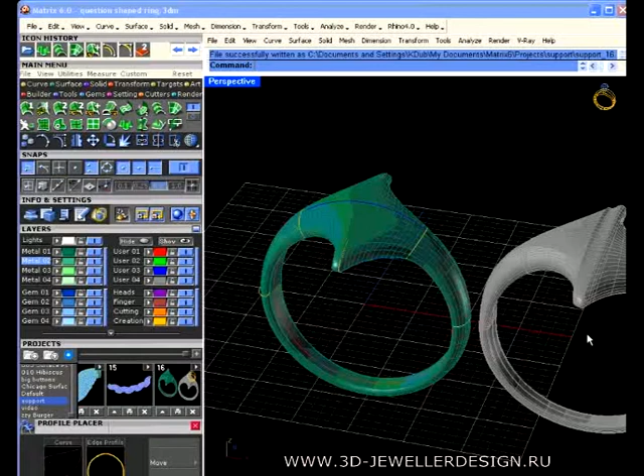Okay, here's a movie on how to do this ring, and you know, these ones, as you have discovered, some of these seemingly subtle, simpler rings are actually one of the harder ones to get a smooth surface on. And here I'll show you how I went about this.

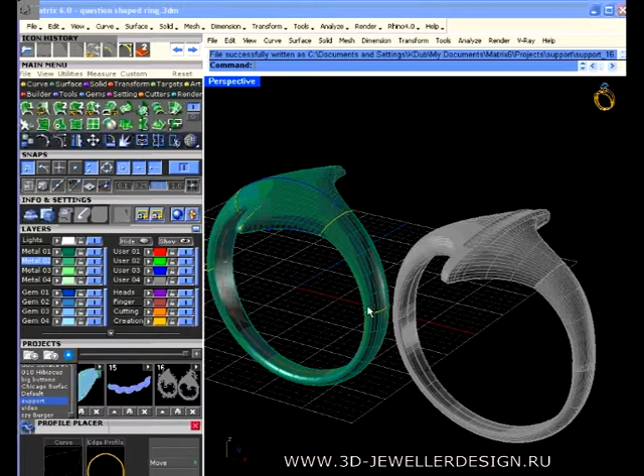And I originally tried to do sweep, multi-rail sweep, and the thing it really doesn't like apparently is here, and it's because this thing comes back around on itself, and that doesn't make sense to sweeps, you know, because it has to be perpendicular to the profile here, but then what does it do when it comes back in here?

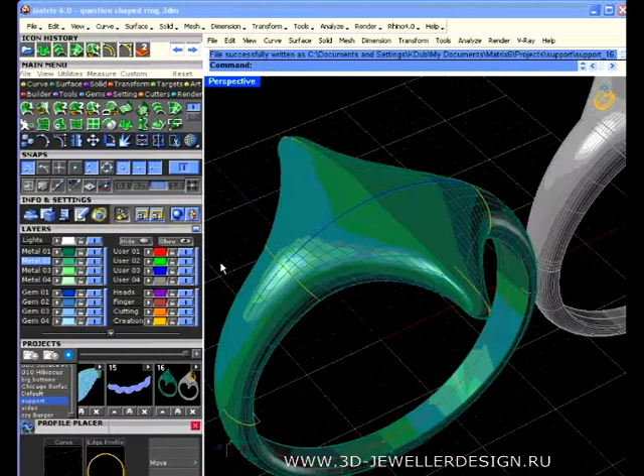Okay, so I'll start from scratch. So let's go file open, and we'll just start out with this thing. Alright, so here's what I did. I'll put you on gray.

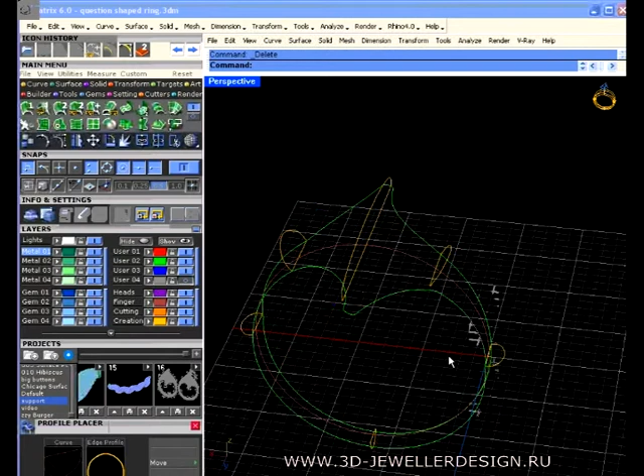Alright, the first thing that we need to always make sure, whether we're sweeping or doing curve network, is that our curves are on the rails. So whether you're doing sweep 2 or sweep 1 or whatever, we always want the curves on the rail, because otherwise we're going to get a solution other than what we expect in places like this. So that's rule number 1.

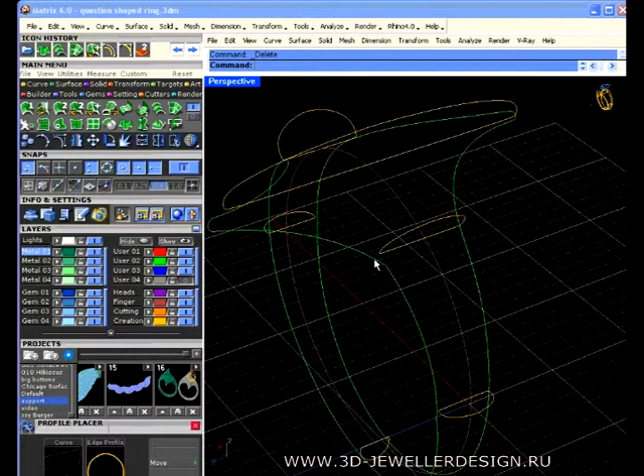Okay. The other thing is, and I don't know, you know, artistically I don't like to change, but I would never have this be sharp here on the sweep, or you will get a ripple in the surface, and chances are when you go to polish it, you wouldn't be able to keep that hard edge in there anyway.

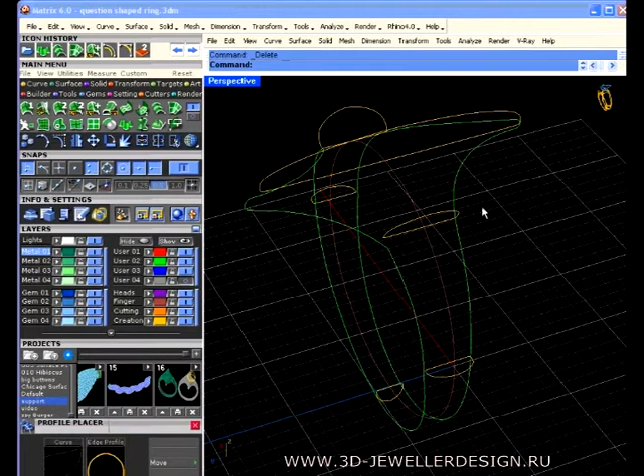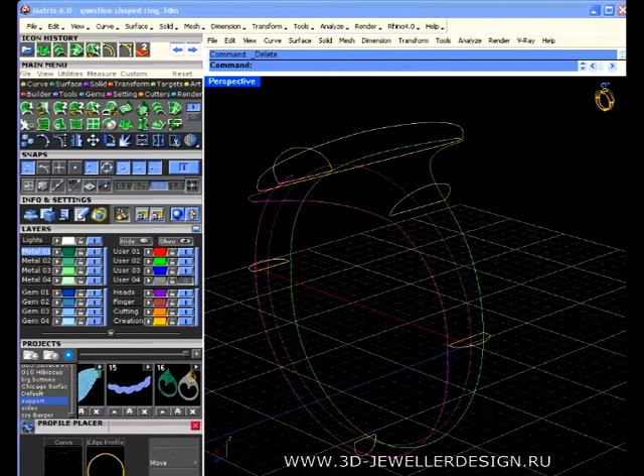But you know, I'm not a jeweler, but I do play one on TV, so I'm gonna go ahead and fix this up, and to do that, the other thing is that it seems like there's a slight ripple in the way this comes down here. Okay, and it's not bad, but let's go ahead and fix this up a bit.

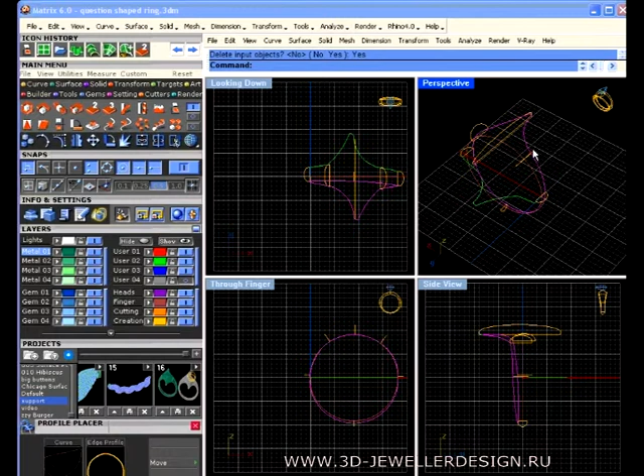So I'm going to draw a plane like this. I'm going to take this one, split it with this, and ditch this bottom part. Then I'm going to go over in the looking down, and I'm going to smash that down flat. So I'm going to click here, project to C-plane, delete input, yes, which gets rid of that one. And we'll get rid of this other side, because we're obviously going to move it around.

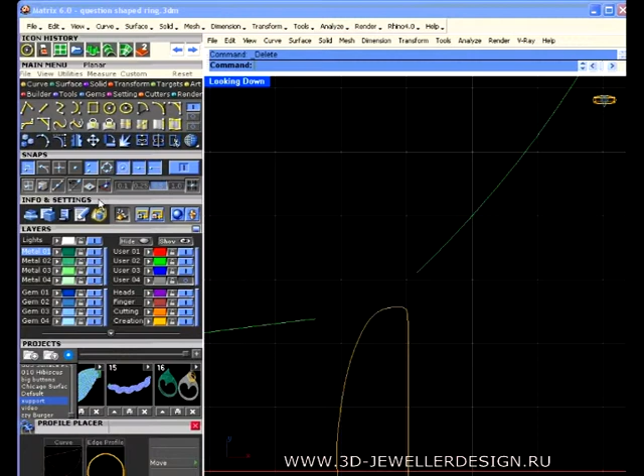Alright, so this needs fixed up here. And the way I like to do these is, I don't usually use fillet. I like to come down here and draw a circle around that, and then trim it, and then use blend. So we'll blend from here to here. Alright, so there's that, and then this, I want this to exit out straight, pretty much. This is all good.

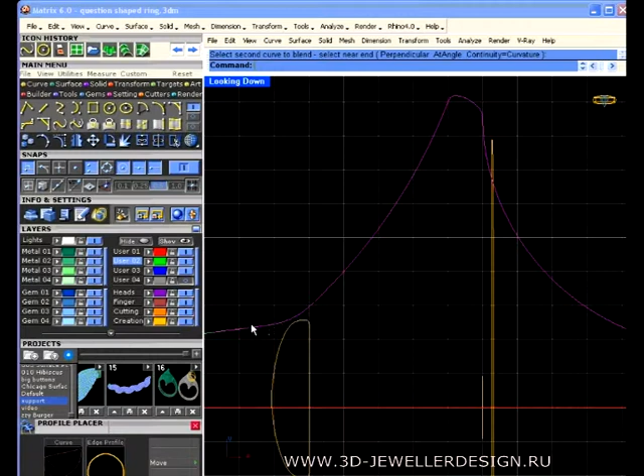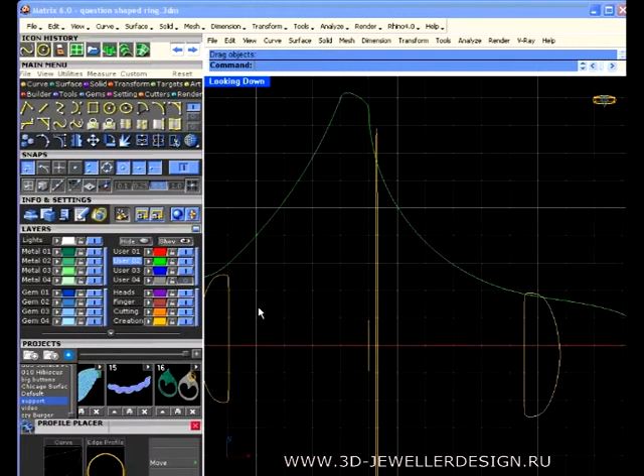Let's join. Yeah, that's trouble right there. Alright, so let's split that back here with a point. And we'll turn on the edit points and come on out this way. And same here.

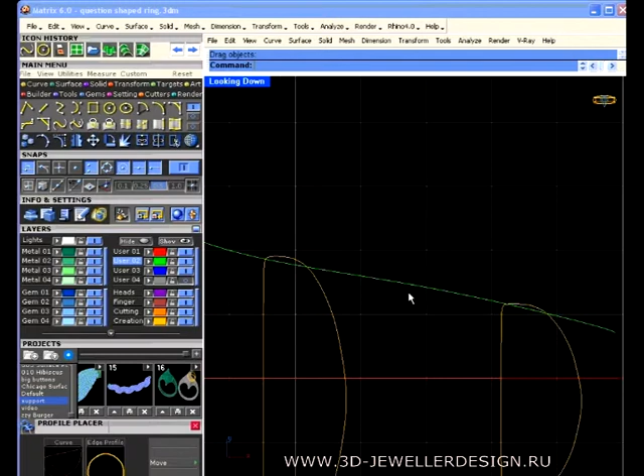Alright, so now we do curve from 2 views, like so, and you get split by this one. Throw that away.

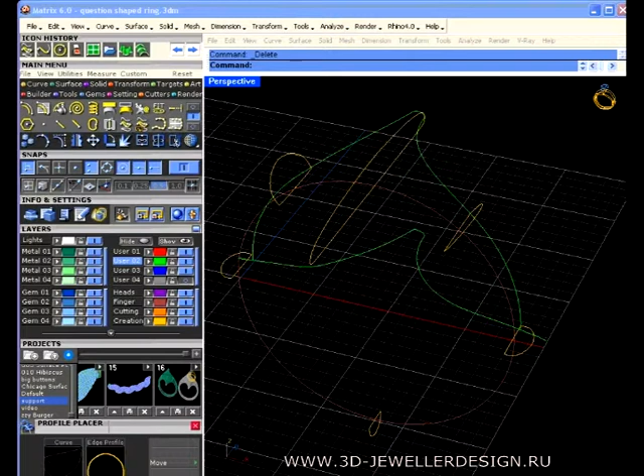Okay, so here we have this so far, and the key to this that we really want to keep track of is we want these to come down and follow the same angle that they're doing here. And so let's go ahead and do that. I always pick 1. In other words, here I'll show you.

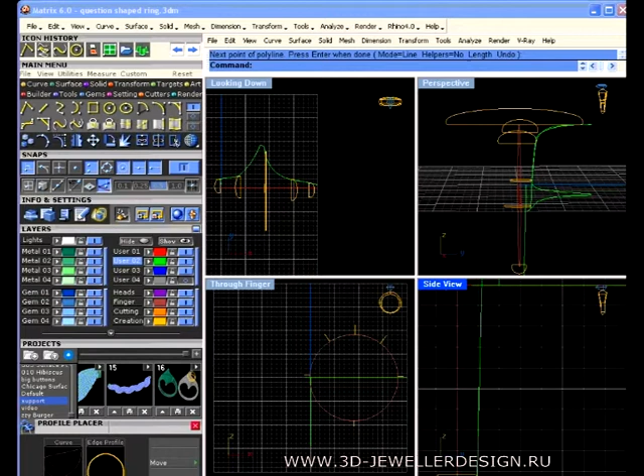So we go and turn on project right here, and we'll keep this going down on the same angle like so. We'll just eyeball that. Helps to have the profile there, I guess. So that looks good. So this one and this one is curve from 2 views up here. And then that's going to match one of them, this one.

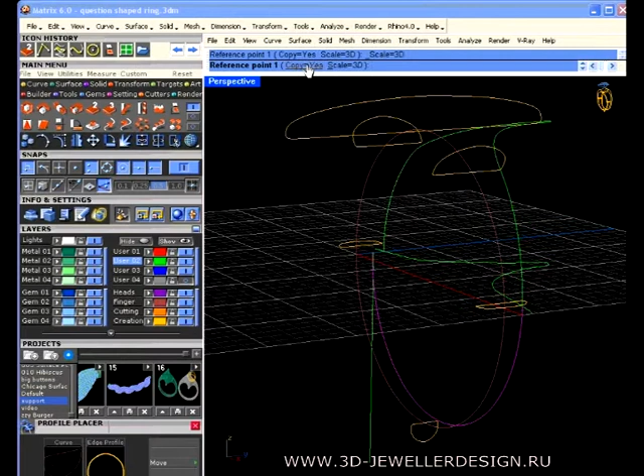But what I do is I just go to transform orient, turn copy off, turn off project, and go here and here, and then back to there and over to here. Alright, and that puts that together.

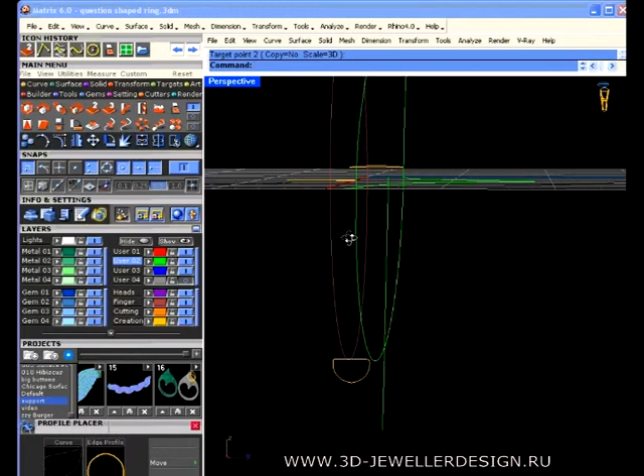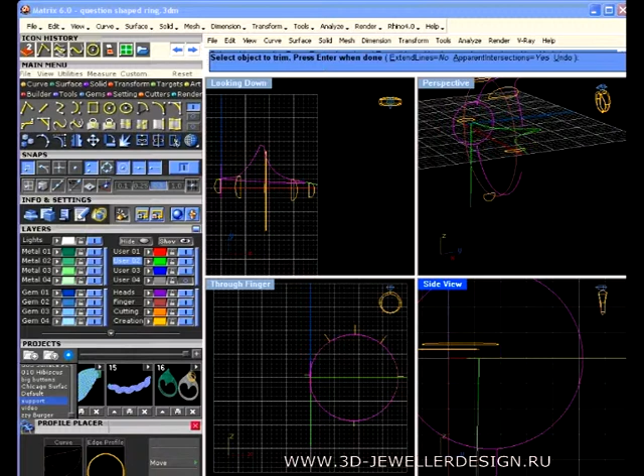And then once again, to make sure that these are kind of flowing the way that they ought to, I do this circle bit. Then we trim. And there, enter. Like so. Then we can blend here to here and here to here. And so that just makes sure that that's all nice and smooth and even.

And then we join, and we'll put this on here. I try not to rebuild that because of the subtlety that you have up here. And if I did rebuild it, I'd split it here and here and then rebuild and then join that back up. But I don't see any reason for a rebuild at this point.

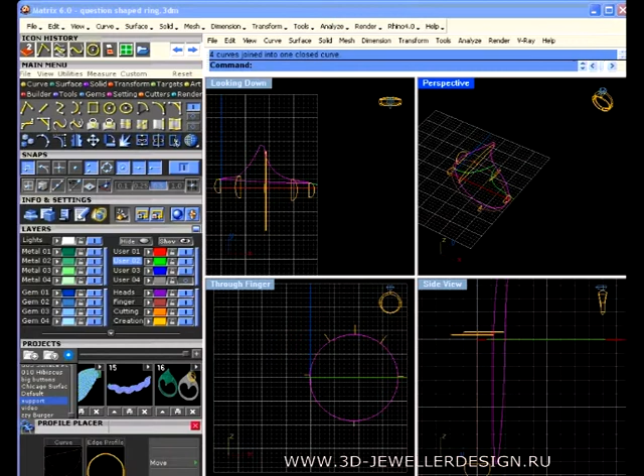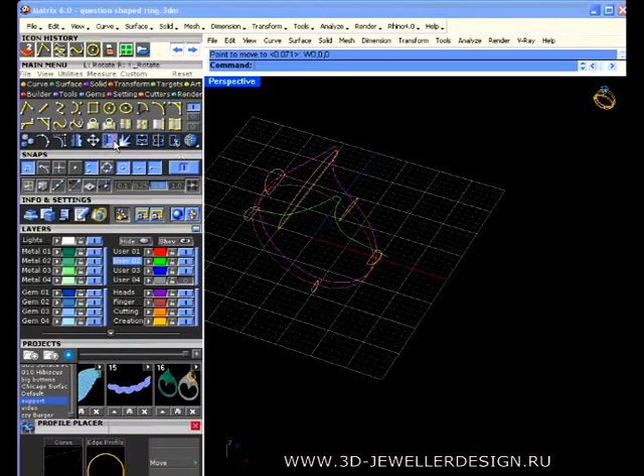So now we go to rotate, copy, F4. Oh, oops, we're not at F4. Okay. So we'll turn on the center O-snap, move from the center of that to F4. So now we are at center. Okay. Now, oops. So now we need to set this up.

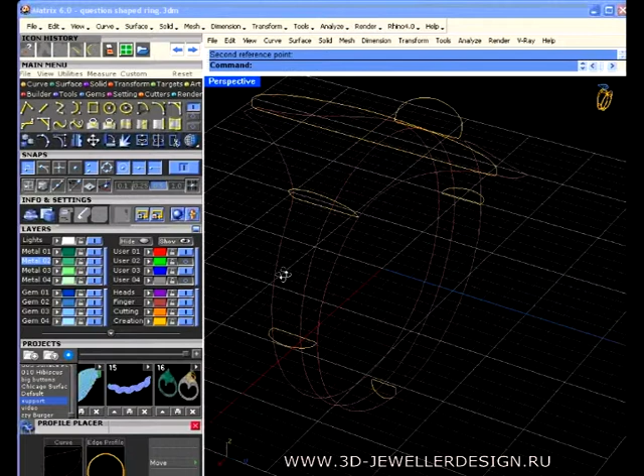And in order to do this, I need one more rail, and I'm going to do that with offset. So we'll offset here. Okay, so with that done, let's take this, we'll put this on this layer and turn on the control points and simply move.

Oops, nope. Undo. Let's see. So we select those 3. Yeah, and we move those up. That's close enough. We don't want to go any higher than that. Okay.

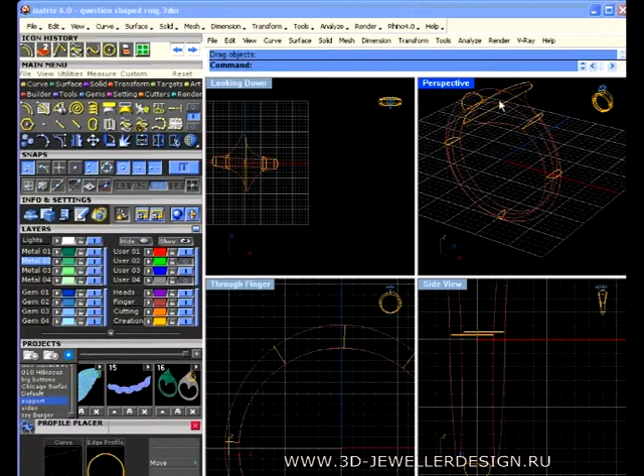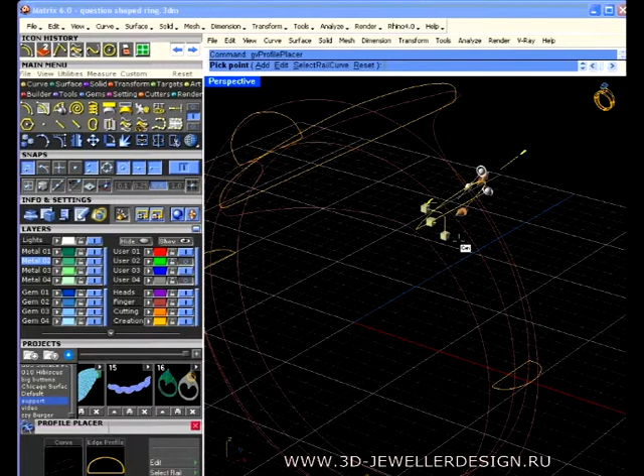Okay, now the easiest way I found in messing around with this - I'm not going to take the time because it doesn't work, but ideally you'd have these profiles attached to this rail. If I hit F6 and go to MSR, this is not attached to a rail, and it must be to do a sweep. So since it doesn't work, I'm not going to bother doing that.

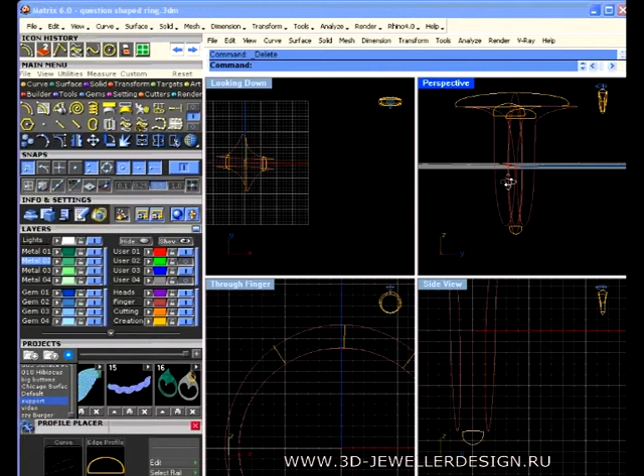We don't need these two profiles. Technically, we don't need this one either, but we'll see how that goes. I'm a little wider here based on how I did this, but I'm going to let that live for now for the sake of time with the video. So don't need that either then.

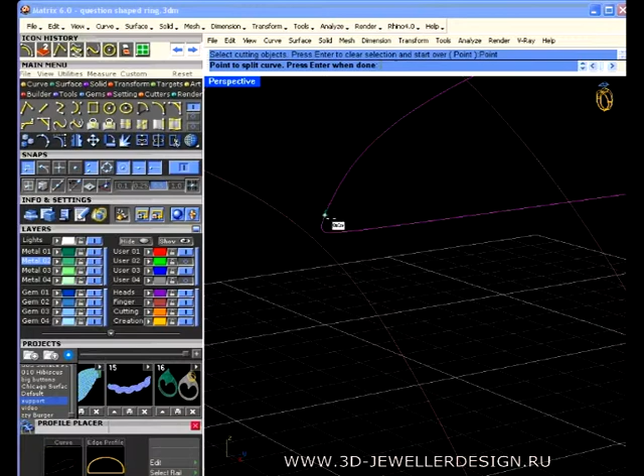So how you make this curve is not that important. We can go ahead and just split this one, and I'll do it two different ways here. Let's go over here and go split with a point, and we'll split it up here, and the same over here. Let's turn that off.

And we're going to orient to - copy, no, here to here - hold down shift, we get an intersect point that is straight across from there, and then we need this to be - well, it doesn't get too much closer than that, so that will work.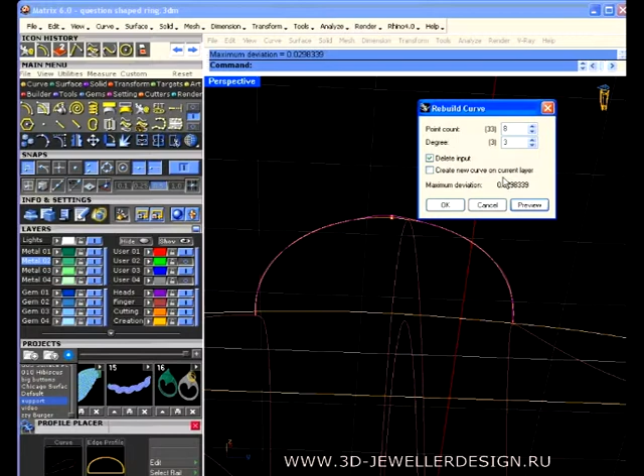Now this thing seems kind of lumpy. I don't know if this is - no it doesn't, it's alright. I'm going to rebuild this. It's got way too many points. Let's hit 8 and see what we get. There, relax that a little bit. Okay, so there's a good profile there.

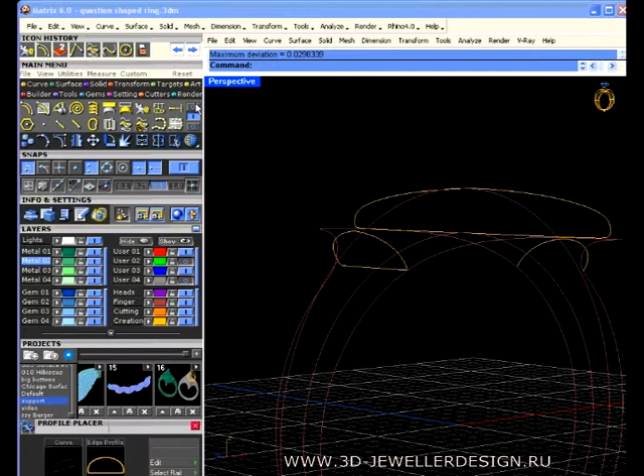The other way that I like to make these is we can go like this - draw a curve, and we'll snap just somewhere on this line. Let's just go there, and we'll turn planar on, and we'll go towards F4 like so. Alright, so there's that, and then we'll take and duplicate from here over to there.

Then we blend from here to here. And then we would take and 1D scale across the center of this. So this is a bit more labor intensive, but if you don't have anything there at all, we would now go 1D scale from this. Let's turn on project. From the midpoint of this to the midpoint of that to the intersect of that.

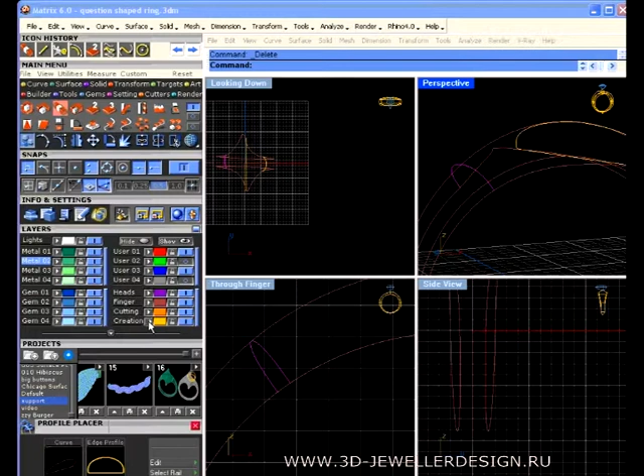Cool. Alright, so either way, but there's how to get a profile in there. And it needs to be on the rails. I don't know if I would use two different kinds, but anyway.

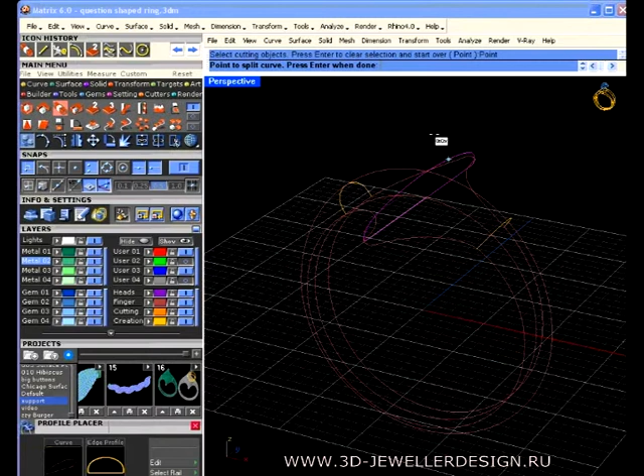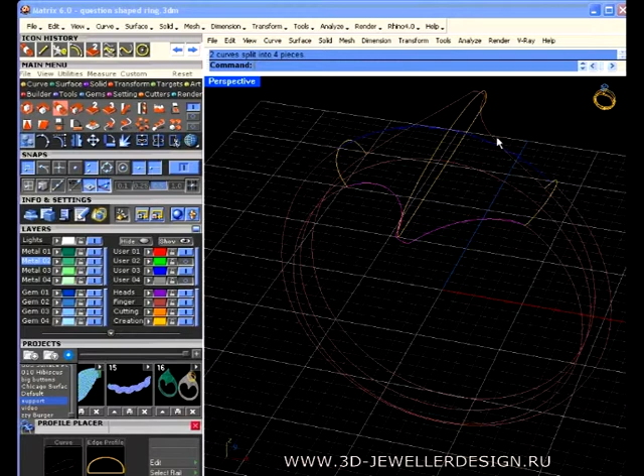Alright, so in the same respect, we're going to come over here and split with a point. And well, check this out. Alright, so this one needs to get split with a point here and here. Alright, so there's that section. And then this one and this one are going to get split with these.

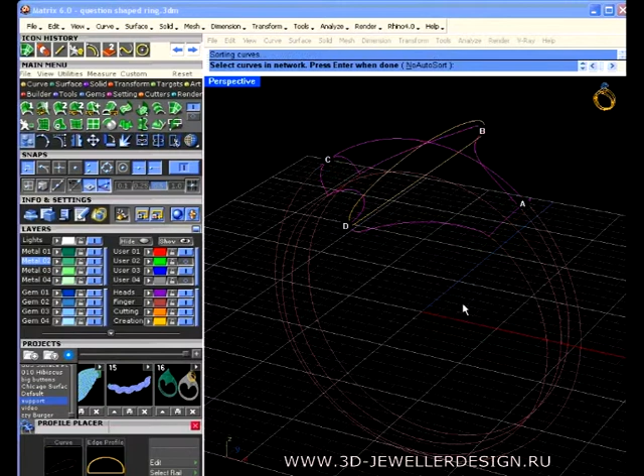Alright, so the first thing we can try is a curve network. So let's go surface curve network, 1, 2, 3, and then this one and this one. And there's all our values. Now this does a good job, but it doesn't address the shape whatsoever. So it takes the shortest route from here to here, and it gets sharp. And that would probably hurt. So that's the concept, though.

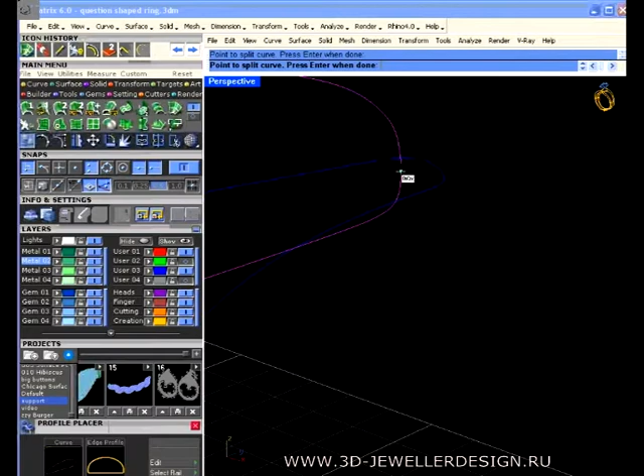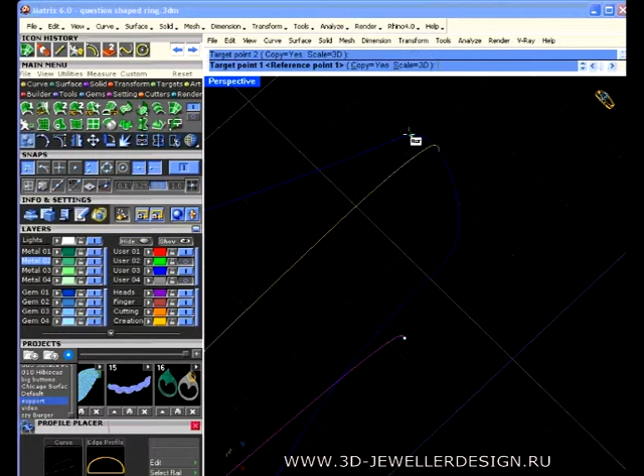Having done that, we can come over here and split with the point here and here. And once again, we're going to go orient to - no, planar or project - here and here, and the outermost point to the outermost point. Not way over here though. We'll stay on this shape here.

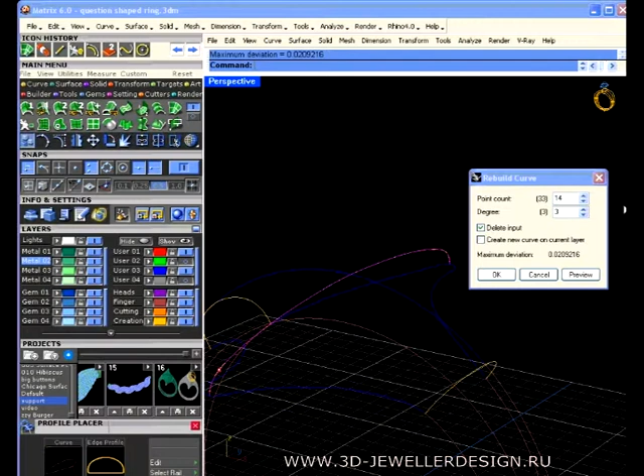Alright, so let's nuke the old one. There we go. And I'm going to rebuild this one too. So rebuild, preview. This is the greatest deviation, and that's not too much. Cool. Alright, yay, here we go.

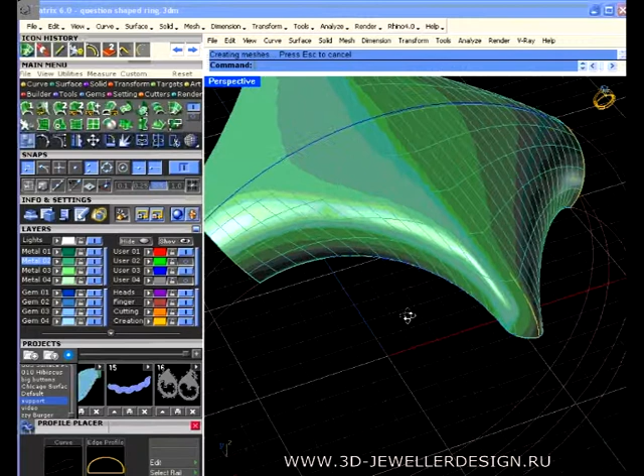So now we'll pick this business again and hit curve network. And now we get this realized. And what's cool is it'll deal with this without folding over itself. Okay? So we're in business. At this point, I would go here, here, and here, and here, and there, and do curve network again. And that'll run that around like so.

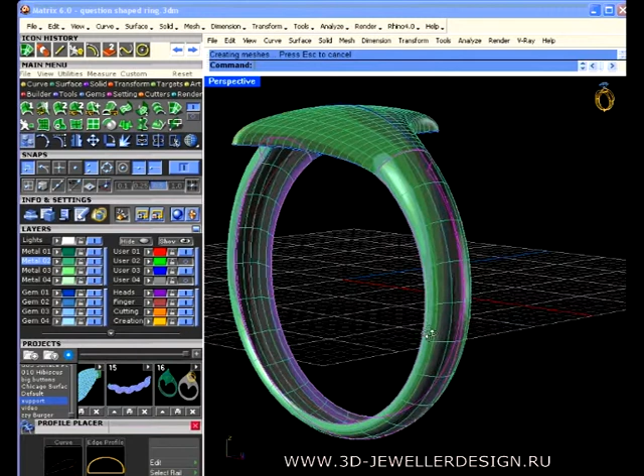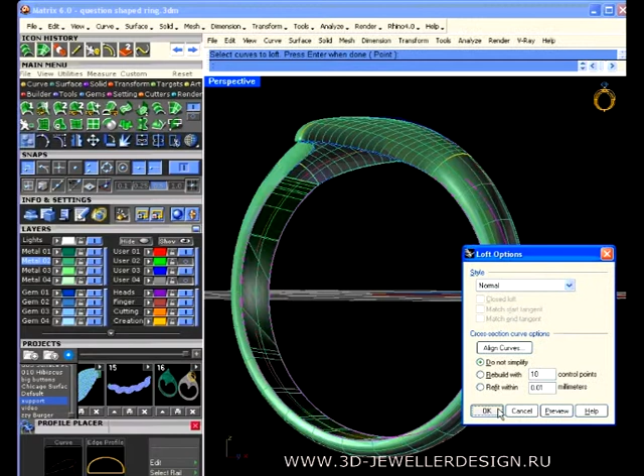Alright, now there's different ways to do this inside surface. You could certainly loft, and loft is going to go from here to here, and it'll deal with it, but you're going to get some weird orientation between one surface and the other, and it gets even more weird up here because it lofts from here to a different solution over here, and so that's really disappointing - loft in that sense.

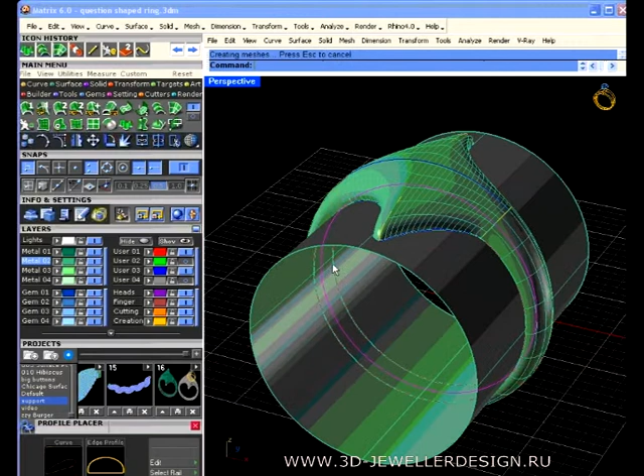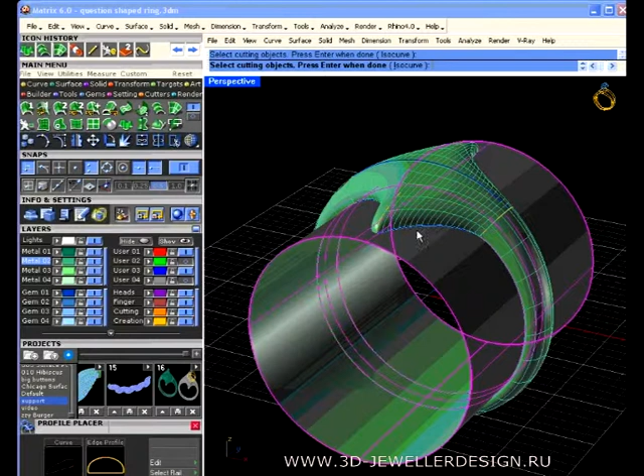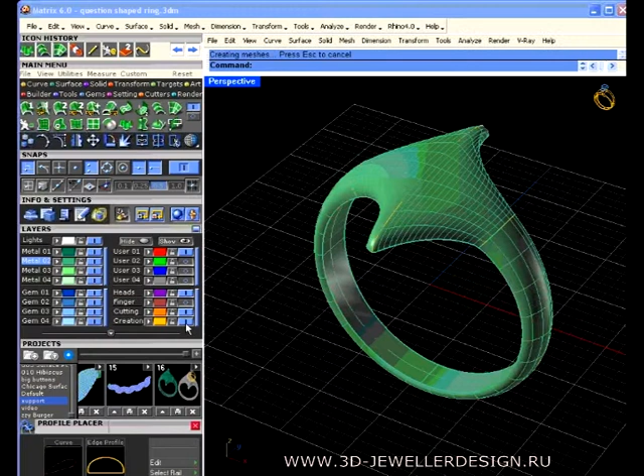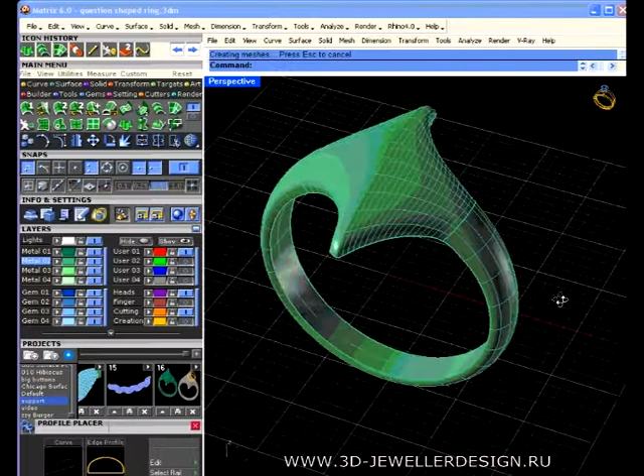And that is smooth there, got no twisting. And so yeah, this little angle and this shape all kind of made for a kind of a hard surface to build, harder than you'd think, but hopefully that's spot on to what you want. So there you go.